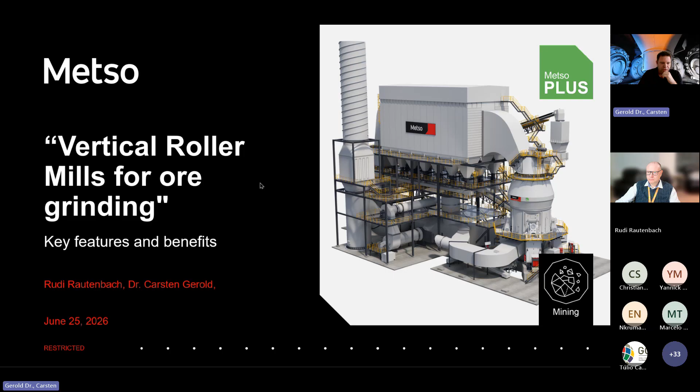So the final outcome is that for this given project, the VRM is the preferential case. Now I would like to guide you a little through vertical roller mill for ore grinding—what are the key features and benefits. Some of you know the technology very well, others don't, so I'll try to squeeze in as much as possible within these 45-50 minutes. There might be some points open, but kindly just raise your questions afterwards, and let's start.

Vertical roller milling technology is not a new technology. In 1927, the grandfather of the current owners invented this technology, and the start of the company making vertical roller mills was in 1927. The company itself is a little older, from 1906. We introduced this technology into a new market, which was raw material or raw mill grinding, basically limestone grinding in the cement industry. Afterwards, Loesche was the first to introduce this technology to cement and slag grinding, and additionally to industrial minerals.

Since a longer time, we also have a few applications in ore grinding, and the latest one is the West Musgrave project, where we have been awarded a 12 million ton copper nickel grinding plant in Australia. So this is not a new technology—it might be new for the ore industry, and surely we see regional knowledge differences. For example, in Australia a lot of people are now familiar with it, in South America it increases, in South Africa also some more people know about it. But together with Metso, we are very positive that we can spread this technology much deeper into the industry.

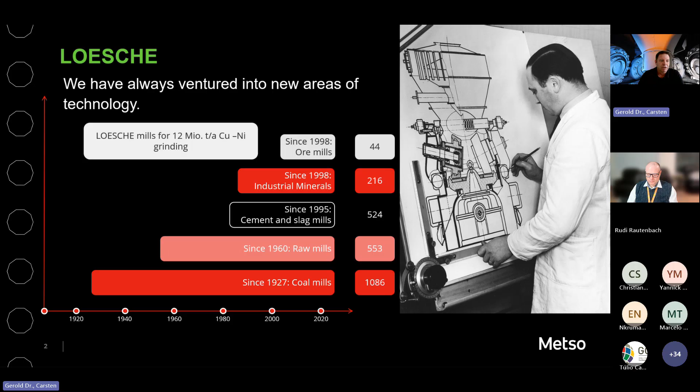Okay, let's talk about the functionality and the flow sheets. On the left-hand side, you see a grinding plant, and it's actually crushing and grinding.

The VRM, or vertical roller mill, is kind of misleading because it's really crushing and grinding. The advantages we see are that depending on the circuits we utilize, we can provide energy savings up to 40%. It's a dry grinding technology, therefore it enables fully dry or reduced water processes.

We don't have the need for grinding media. It's a very compact design that can be achieved, comparable to the footprint of an SABC circuit, but with reduced civil and steel works. The technology has an outstanding reduction ratio of 3,000, or actually even much higher than that.

We can theoretically feed 150 millimeter and grind them down to a P80 of 20 micron, mainly by an internal grinding classifying circuit. What we see through the compressive grinding that we do is that we get an improved mineral liberation, less sulfide oxidation, steeper particle size distributions, improved downstream recovery, and up to 7% better flotation performance.

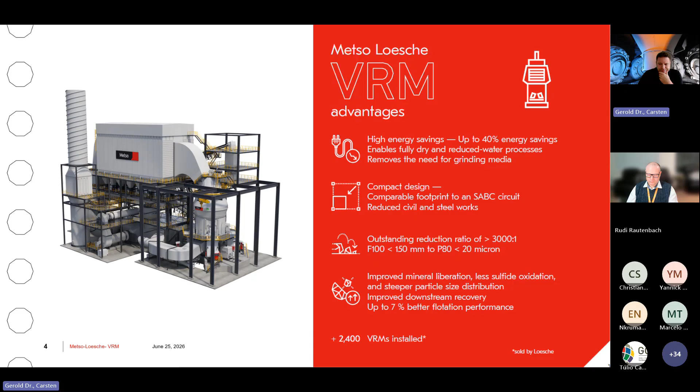Up to now, we installed more than 2,400 VRMs. And there's different points we will touch today.

So there's the columns of operating expenses. We just mentioned up to 40% energy savings. We have few stages of reduction, no grinding media. The water saving potential is up to 25%.

We will get examples for that. It can also go higher. And grinding media saving is also a big point. It's up to 97% lower metallic impurities.

Other points that we will touch are the downstream behavior, like the steeper particle size distribution curves we get with up to 20% less fines, minus 20 micron. We see a superior mineral liberation rather than size reduction. And like already stated, up to 7% better flotation performance.

The particle size distribution we get out of the machine, because it's pretty steep, also improves the recovery and magnetic separation or density separation. And the point which I think is really important for the ore industry and very beneficial is the operational flexibility, because the technology can adapt to feed changes within minutes.

It offers stable production and product quality because all the main grinding process parameters are online controllable. And having a dry grinding product, you can buffer between the comminution and beneficiation process, which can be very helpful in different occasions. But now let's touch the OpEx aspects a little bit more.

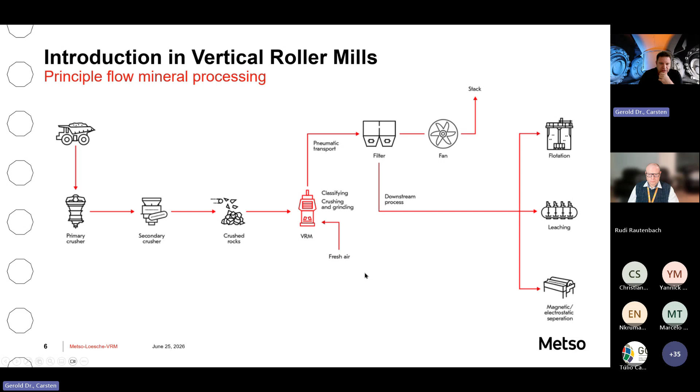I'd like to recall it's a dry grinding principle. And the final product is dedusted in a baghouse. Usually the target is to produce a primary feed for primary flotation, for fine leaching, or for the rougher magnetic separation. We will talk a little about the way how the mills are built up.

The comminution area, comminution zone, with the grinding table and the grinding rollers, in our case conical. The grinding happens, or crushing grinding happens, in a compressive bed, and through the conical rollers we combine compressive and shear forces, which brings us a pretty good degree of liberation.

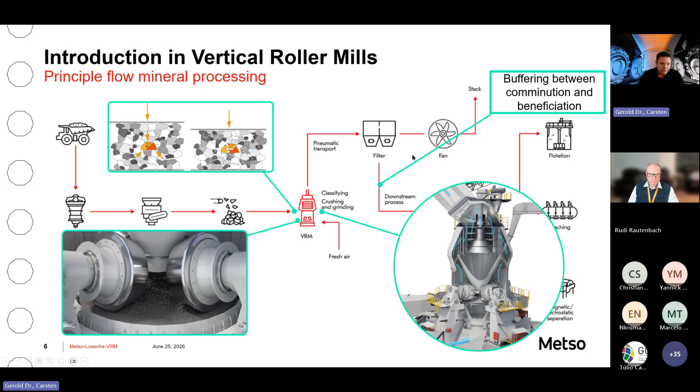And like said, having a dry grind product, we can buffer between comminution and the beneficiation processes. The reduction ratio of these machines is really astonishing, and therefore processes can be much simpler with increased efficiency in comparison to other technologies.

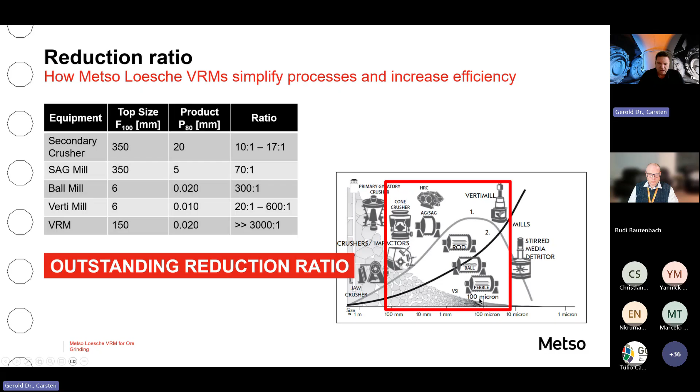So you can either feed it very coarse, if you have a soft material, but you can also feed it with 150 micron if you want to grind iron concentrate for pelletizing, for iron pelletizing. So it's a really flexible piece of equipment.

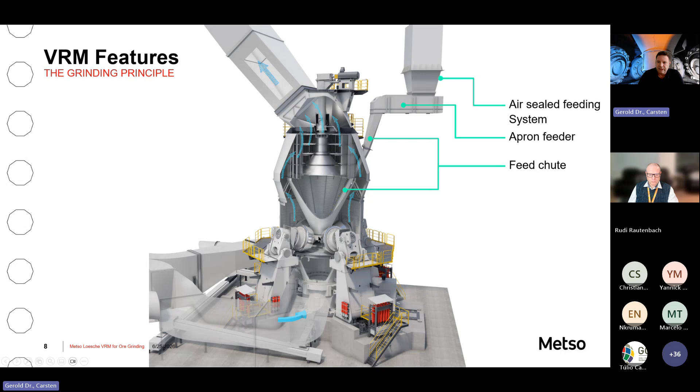The mill table is driven by the mill gearbox and the mill motor, and then we have the grinding rollers, which are fixed. The comminution zone is between the fixed grinding rollers and the turning table. In the bottom, you see the gas inlets.

So the fan is sucking air through the mill, through the baghouse, and then, if you like, you can recirculate it. But the bottom part has the job to equalize the gas flow, and then the gas evenly streams into what we call the process room or process area.

The grit cone has two jobs. On the one hand, it optimizes the gas flow to the classifier. It's a high efficiency dynamic classifier, which you see on top. At the same time, everything that the classifier rejects is guided back to the center of the grinding table, where it's recombined with fresh feed. So we mainly have an internal grinding classifying circuit. There's just a little portion of about 10% that is then discharged via conveyors here at the bottom and mechanically transported, because we don't want to apply that high energy to also keep these big particles in the mill.

The classifier, like I said, is a fourth generation dynamic classifier. And then the product gas stream goes to the baghouse.

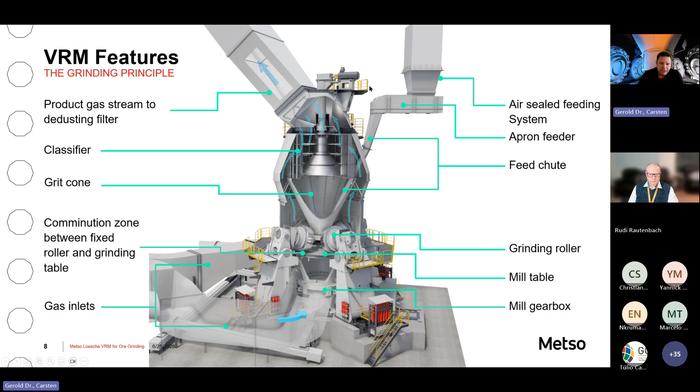This is how the mills look from the inside. This mill is a 69.6, that means 69 decimeters, so 6 meter 90 table diameter and 6 grinding rollers. The height up to here is about 35 meters, so it's a big piece of equipment that we're talking about.

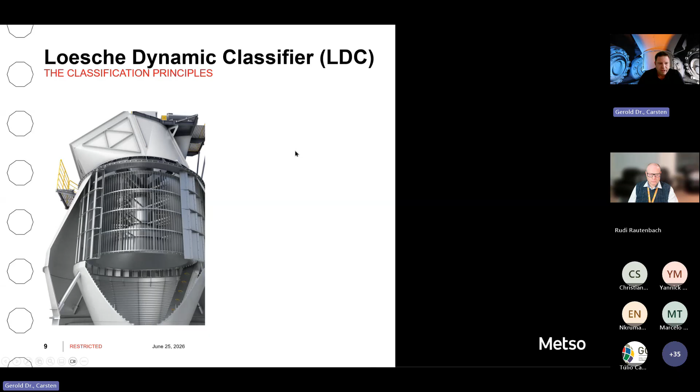Because the classification is completely different to what you usually know in cyclones or screens, I think it's worth touching on the classifier itself a little bit. The classifier consists of the guide vanes, which are static. You see them here on the outside. Then we have the rotor, which is the internal part. The rotor is turning. The rotor blades are the vertical blades that we can see here. And the rotor is driven by a motor in the gearbox.

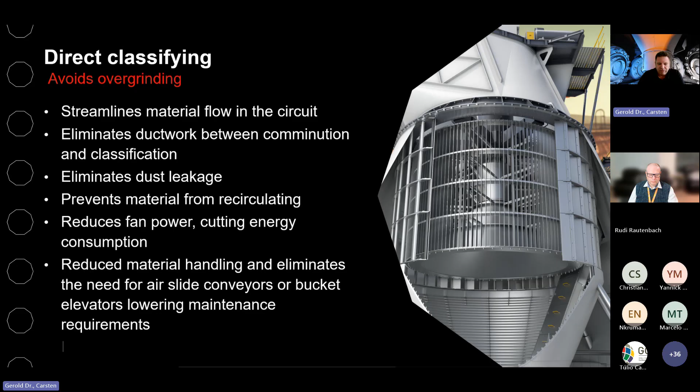The advantage of the classifier is that it really streamlines material flows in the circuit. It eliminates ductwork between comminution and classification. It eliminates dust leakage, so it's really good because a lot of people are concerned regarding dust emissions, but because everything is at negative pressure, you don't have to fear about that. The classifier prevents material circulation. It reduces fan power, and therefore it cuts energy consumption. It reduces material handling and eliminates the need for air slide conveyors or bucket elevators, which lowers your maintenance requirements.

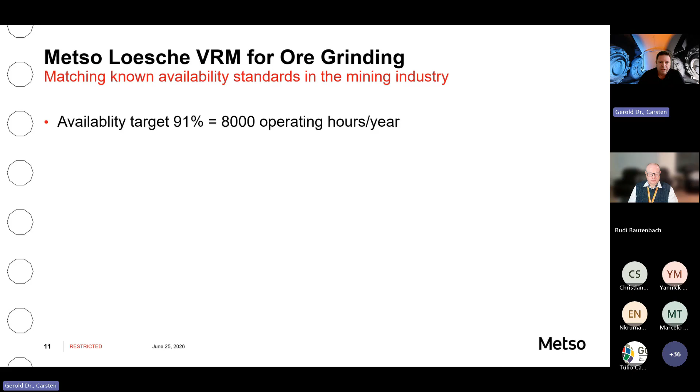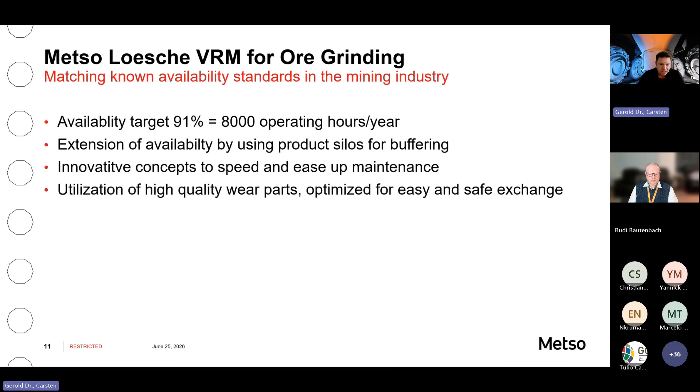So what is the difference now with a Metso-Loesche VRM for ore grinding? The point is there's a lot of VRMs on the market, but we really took a lot of time and research and optimization work to make it suitable for the mining industry. Because within the mining industry, you have to achieve at least an availability of 91%, or 8,000 operating hours. We can extend that even further by using the dry product silos for buffering. We have a lot of innovative concepts to speed up and ease maintenance, because that's important to get acceptance in the industry.

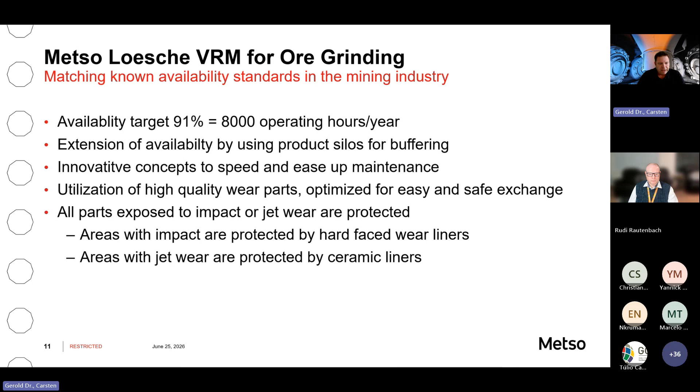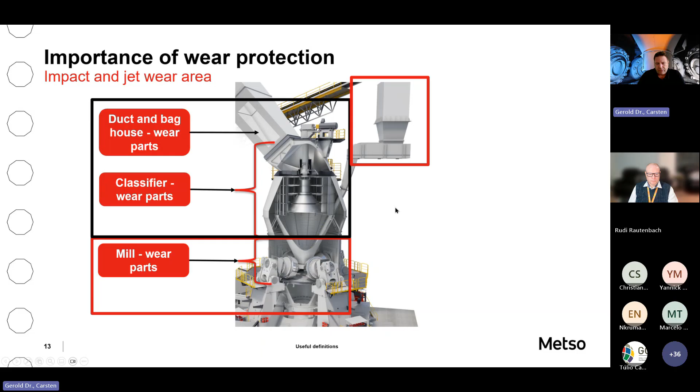Therefore, we choose different wear products for the different areas of the circuit, and that makes it basically unique in the industry.

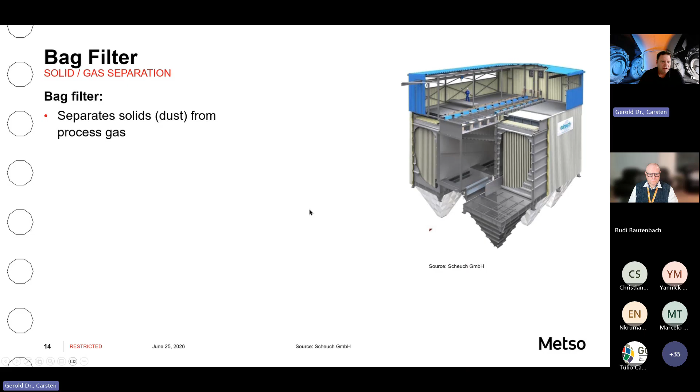Another piece of equipment that is probably new to you is the way we de-dust the systems. In this case, the example of a Scheuch baghouse, because somehow we have to get the solids out of the gas flow, and that is done in these baghouses.

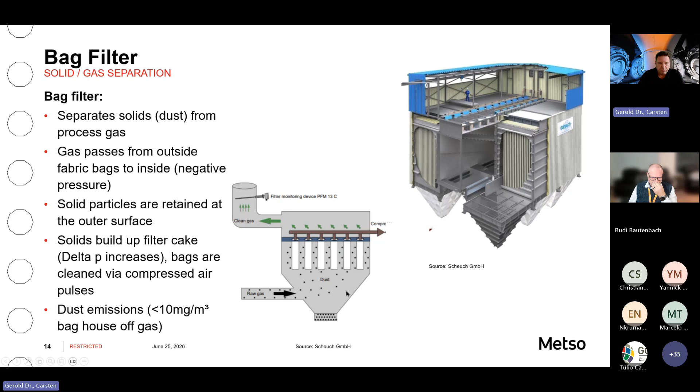So this is the way we can de-dust the material out of the gas stream. The dust emissions in modern baghouses are below 10 milligrams per cubic meter. If it's required, we can also reduce that to 5 milligrams.

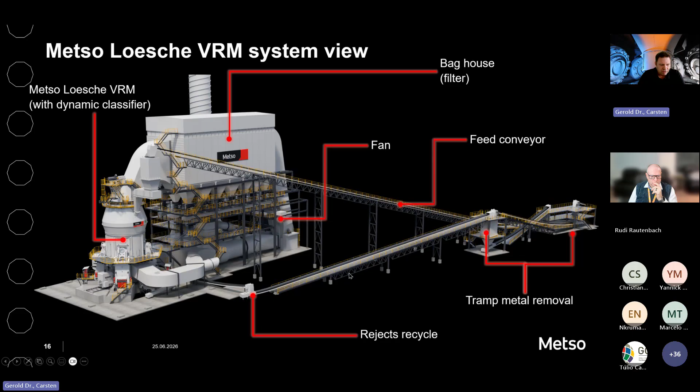And now I would like to show you a short movie because it touches a lot of the points that are mentioned here.

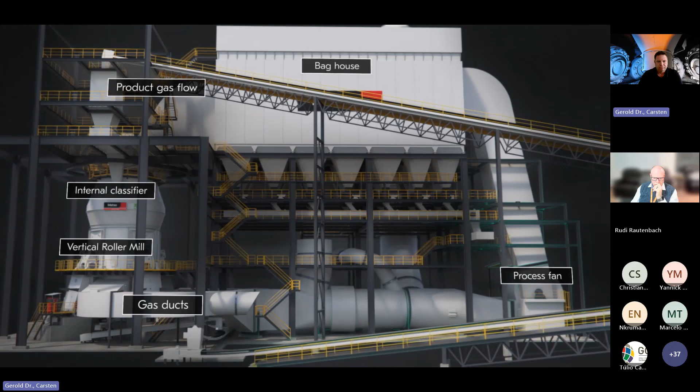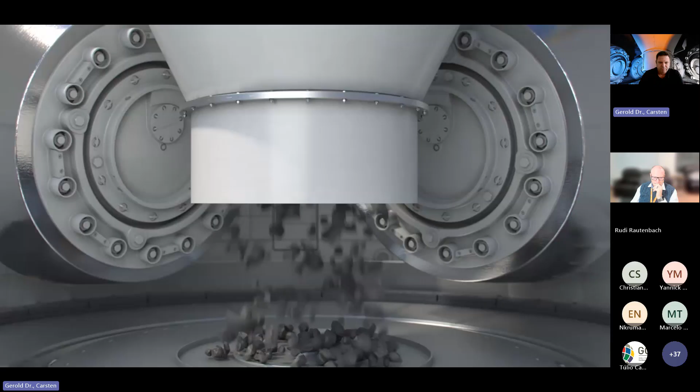Just making a short stop here because I think, especially for comminution people, this is the interesting part. So the material is fed to the center of the grinding table, and then via the speed of the table distributed to the outside below the roller. Circumferencing the grinding table on the right-hand side here to be seen is what we call the dam ring.

We utilize the height of the dam ring to adjust the product particle size, respectively the retention time. Surrounding the grinding table is what we call the louver ring. This is where the gas enters the system. And just so you understand, what is happening in the comminution zone is between the grinding roller and the grinding table.

Okay, so now let's talk a little bit about how the VRM increases the efficiency of the mining industry. Coming back to that slide with all the benefits, we now want to touch a little bit on the downstream behaviors. Therefore, it's important to understand how the comminution or rock crushing grinding really happens, because we have a bed breakage. Let's say this is between 60 to 120 millimeters, depending on the mill size and the final product particle size.

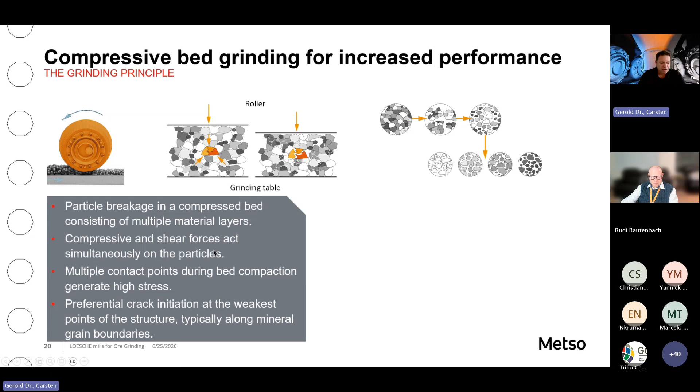But you will always have multiple layers, so the particle breakage happens in multiple layers. It's a combination of compressive and shear forces, which act simultaneously on the particles. We have this fluid-like stressing from all sides on the agglomerates, and therefore we see preferential crack initiation at the weakest point of the structure, which is typically along the mineral grain boundaries.

Resulting microcrack formation enhances liberation while reducing excessive fines generation. It's an enhanced intergranular breakage that leads to an improved degree of mineral liberation, and we see increased selectivity due to the preferential breakage of the mechanically weaker mineral.

To add to that, I forgot to mention, because usually you don't have that much control over your grinding forces. Within the VRM, you have the hydropneumatic spring system where you can steplessly control your grinding forces and thereby really optimize them for the purpose.

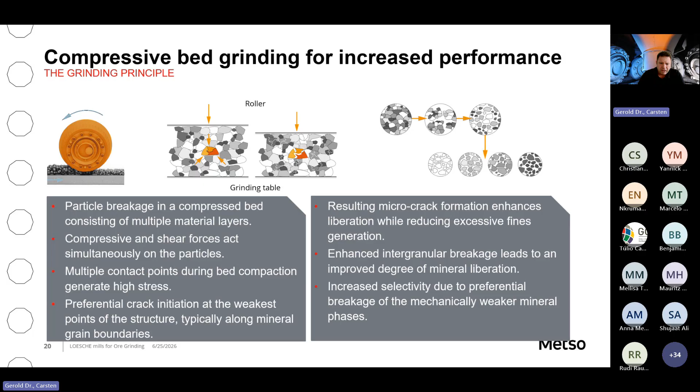And the result of this, the way we grind - within the movie, you saw that after being ground, the material is accelerated and then gets the chance to be classified. So with this very quick internal grinding-classifying circuit, after 1 or 2 grinding contacts, we classify the material. We take it out as soon as it's fine enough and according to the specification. That results in a completely different product particle size.

This is an example of joint work we did with Anglo American on a UG2 platinum ore. The bond work index is around 24. What is compared here is, in green, the product particle size of a VRM in comparison to ball milling. The black curve is the industrial ball mill, the gray one is the laboratory.

What you can see is we have a steeper particle size distribution in total. We have less fines, and we have less coarse. That changes your degree of liberation very much, because in that coarse area there's still intergrowth between your valuable minerals and the gangue material. But with that direct classifying we have, we get a very efficient classification, a steep classification. Therefore, these product particle size distributions look different.

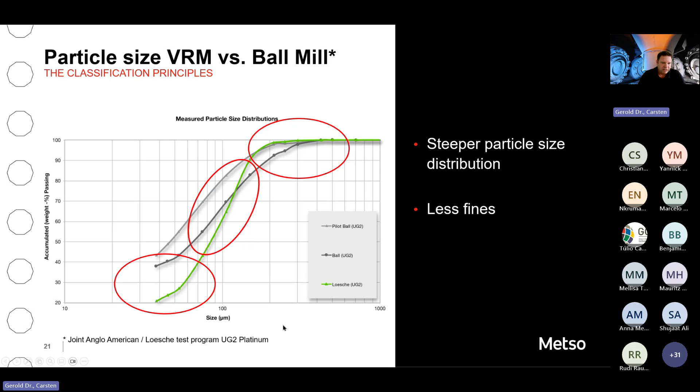And if it's steeper, it's easier to adjust your downstream process. So every particle gets the treatment it requires.

In comparing the VRM system to other systems, in this case done with Anglo American research on a zinc ore, a SAG mill ball mill circuit was compared with a crusher HPGR ball mill circuit, cone crusher vertical roller mill, and cone crusher HPGR vertical roller mill. The most energy efficient was the combination of cone crusher and vertical roller mill.

There will be processes where it's very beneficial to combine an HPGR with a vertical roller mill. But in this case, because it was a zinc ore, it didn't really make sense. The energy saving here that was achieved was above 31%.

The freshly created dry surfaces respond very well in flotation kinetics. Copper floats very well anyway, but even here we could increase copper recovery about 1.3%, and molybdenum recovery by about 6.5%. That's explainable because molybdenum is a very soft metal, and usually in the ball mill it tends to be overground and starts to smear. But because we directly classify it out, we could highly increase the molybdenum recovery.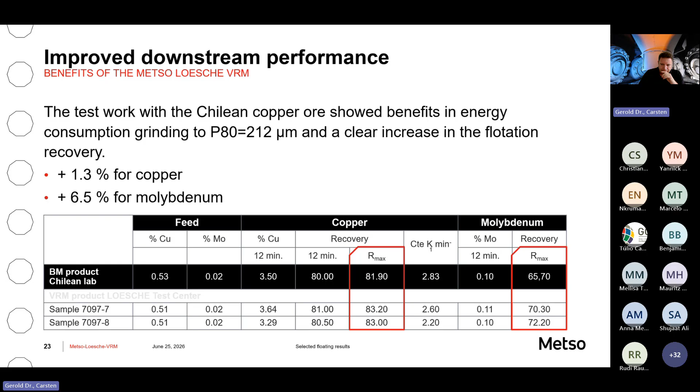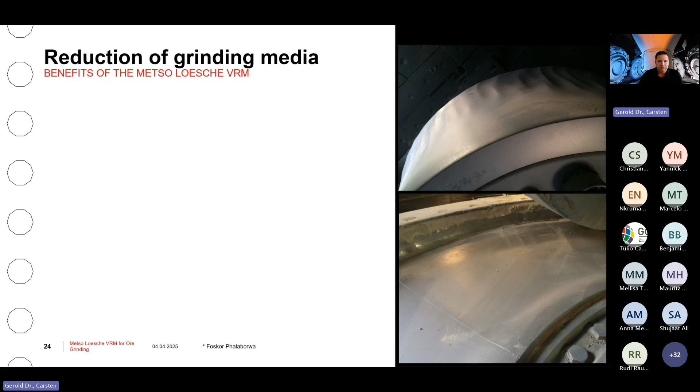So this is something we often see, depending on the element, sometimes stronger, sometimes weaker, but we often see improved flotation performance. Speaking about grinding media consumption, in this case it's a plant where a VRM is operated in parallel to a rod mill ball mill plant with a tertiary crusher in advance. Here we utilize high chrome grinding elements.

You see on the top right the grinding tire, and on the bottom right the grinding track. High chrome is, let's say, the lowest quality that we use. But in this case it's a phosphate rock with a bond work index of 24 kilowatt hours per ton.

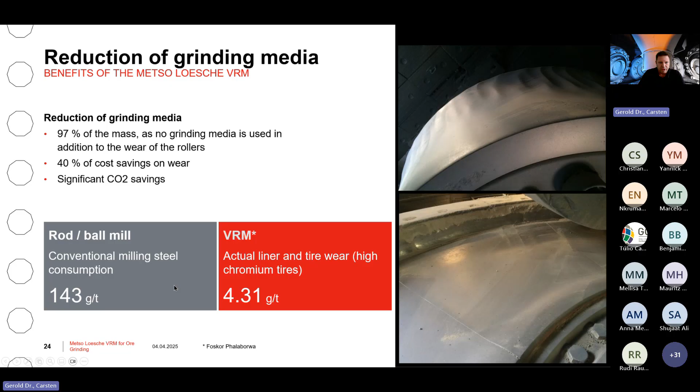The comparison of wear shows that 143 grams specific grinding media consumption is achieved with a rod and ball mill, while the VRM has about 4.31 grams per ton—massively lower, about a 97% reduction. That surely is very positive for flotation because you have less metal in flotation, but you also get a 40% cost saving. And if you consider the metal and its production, there are also significant CO2 savings.

So let's talk a little bit about references and case studies. The first one I want to discuss is the West Musgrave Copper Nickel project. It's an ore with a bond work index of 18.4, and the A times b is 37.3. You can see the other data there.

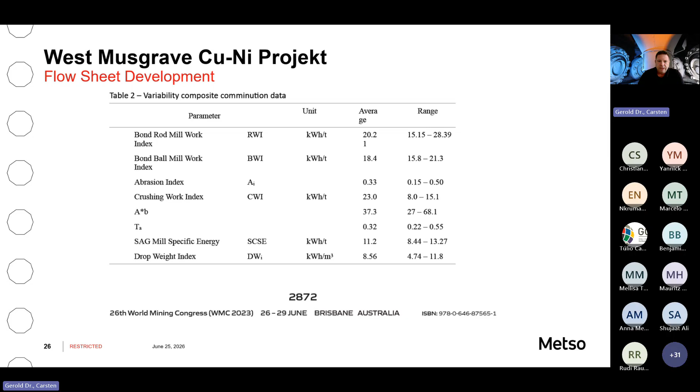Initially they were targeting a SAG mill ball mill flow sheet with pebble crushing and sequential flotation. But this plant is in the middle of nowhere—600 kilometers from the next electrical grid, 800 from the next city, so there's really nothing there. They were looking for ways to optimize project efficiency.

We carried out a lot of pilot test work together with them, and finally, in the pre-feasibility stage, they changed the process to primary crushing, secondary crushing, and then VRM for grinding, followed by bulk flotation and regrinding.

Taking a look at the grinding advantage, in this case we had only a 20% reduction. But considering that this mine is really so far off from anything, the cost saving for providing the energy is massive. It was one of the first hybrid projects.

The target was to go with solar power, wind power, and accumulators to basically run the complete project. This is also one of the reasons to decide for the VRM, because to utilize renewable energies you need a flexible grinding system, and that is very difficult to achieve with a wet tumbling mill. But the vertical roller mill—as all the main process parameters are online controllable—can be easily adjusted to the conditions you have.

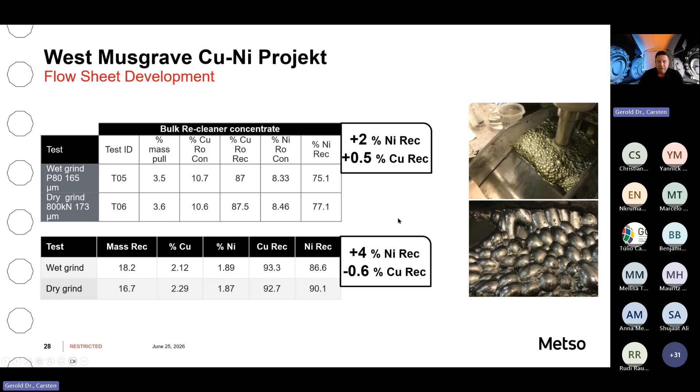But it was not only energy. Different flotation programs have been carried out, and in one of them, nickel recovery was 2% higher and copper recovery 0.5% higher. They also optimized the flotation device a little, and then up to 4% increased nickel recovery could be seen. Copper recovery is more or less similar, so it always depends a bit on how you tune your flotation device, but nickel really responds very nicely to being ground dry, and we saw that in a lot of other projects too.

So when we take a look at the plant layout that was chosen, you see that it's two plants, one behind the other. The feed is coming from the right-hand side. And at the end of the process, the product is buffered in 3 product silos.

So they have a 12 million ton per annum production with 1,500 tons per hour capacity in the grinding and in the flotation. With these bins, we can offer a continuous operation of the flotation circuit during maintenance, just because you take out one of the plants, but the other plant can operate with a slightly increased throughput, and you still have these 18,000 tons of silo, which are just possible because it's a dry grinding product.

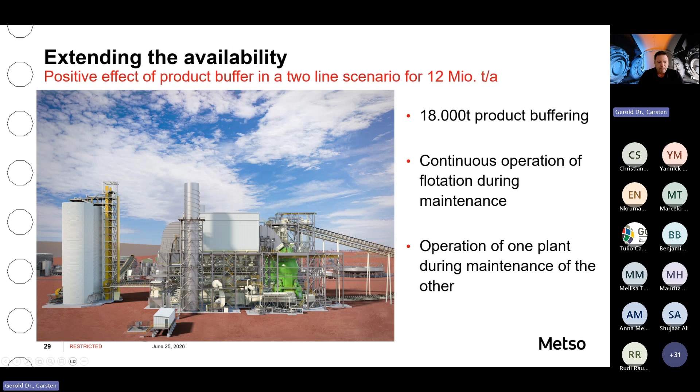And then you can do maintenance on the plant, and when the maintenance is over, you just switch back the plant, and then you're back to production.

To show you what happens, it depends on how much you want to reduce your flotation. The normal case would be 1,500 tons. But if you reduce it basically to 1,000 tons, so you reduce the capacity in flotation by 33%, you could basically run maintenance for a very long time. This is a thing where I really see a benefit in dry processing or dry grinding.

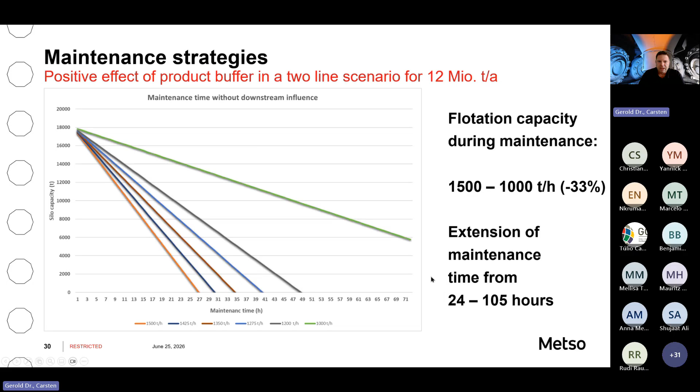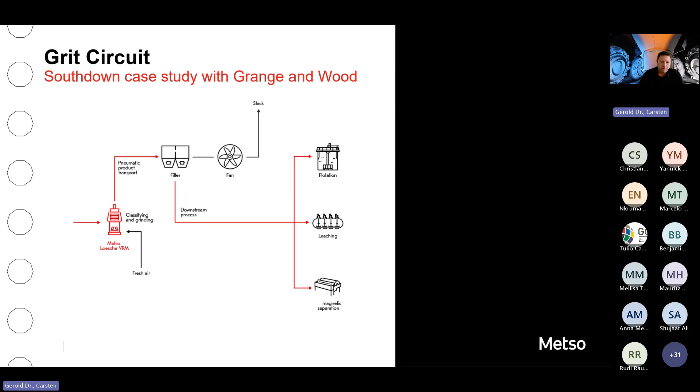Now let's come to some other circuits. What I showed before is what we call the airflow circuit. The case I want to speak about now is the Southdown case, a bankable feasibility study with Grange Resources and Wood for a project in Western Australia.

Initially, the flow sheet looks similar, but what is different is we take the coarse fraction of the classifier, guide it to a magnetic separator, and we just recirculate the concentrates, while we try to separate the non-mags, the gangue material, as early as possible.

At the same time, the main idea is to produce a product for dry magnetic separation and flotation, but surely we want to reduce the amount that has to be ground. By that process, we have an early waste rejection.

We have a reduced amount of ore to be ground, because you can imagine all the silicious fraction that we take out is increasing the capacity, reducing grinding media consumption, and also lowering the energy. We just lately received the patent for this process, and therefore we really think it has a lot of potential.

Additional to just reducing the mass to be ground and optimizing the process, where it's getting really interesting is that this size fraction is about P80 250 to 550 micron. So you can do very nice things with that.

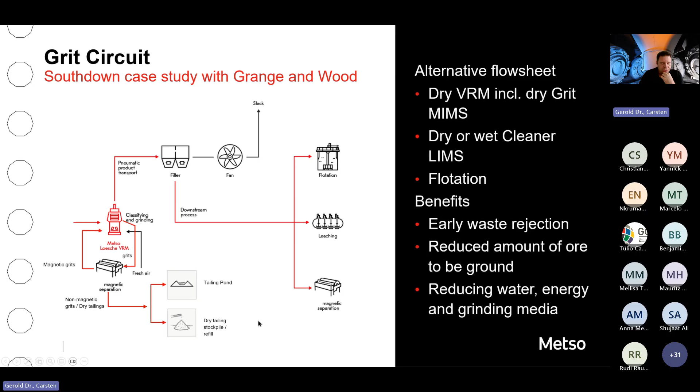Originally, within that project, all the gangue would have gone to a tailings pond. But within that project, because we could separate about 35% of this dry coarse fraction, it can be commingled with your fines from the other processes. So basically, just by changing the process, you suddenly can switch to dry stacking. And regarding the permit structure in a lot of ore projects, that's a real benefit.

So giving some more numbers from the pilot campaigns that led to the project: within the pilot test work, we even achieved higher rougher magnetic separation rejection of 41%, but for the business case, that was reduced to be more on the conservative side.

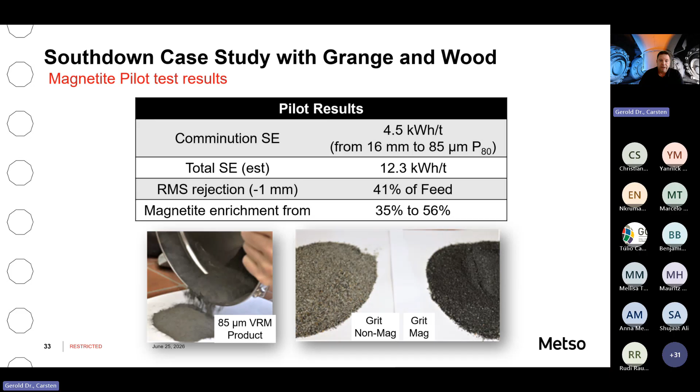But the magnetite enrichment that could be achieved simply in the grinding - you could increase the magnetite from 35 to 56% as part of the grinding. And that really simplifies your process, and it highly extends your dry processing.

Comparing now the final data of the solution that the Metso-Loesche VRM provides in comparison to the wet milling, which was an SABC circuit, wet SABC circuit, which resulted in 20.8 kilowatt hours per ton, we had a 41% saving of energy.

We could increase the gangue material that was rejected by 9%, and the plant water consumption could be reduced from 5.1 gigaliters to 3.9 gigaliters, which is 25%.

But one of the biggest issues is changing, or being able to change from wet to dry stacking. The saving in energy equals 127,500 megawatt hours per year. In water, it's 1.2 gigaliters per year.

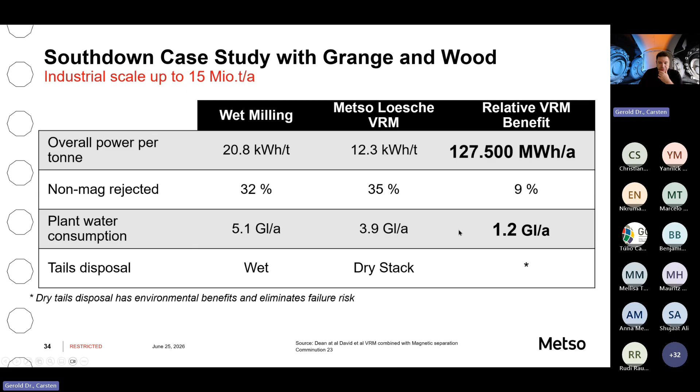And to visualize that a little bit, 127,000 megawatt hours is about the energy consumption of 9,100 average households in the EU. And when you consider the water amount, that's about 1.3 Olympic swimming pools per day of water that you save.

And surely for areas like Australia, Chile, Peru, Southern Africa, Northern Africa, where water is critical, this can have a massive impact on your project economics, and also in getting it running at all.

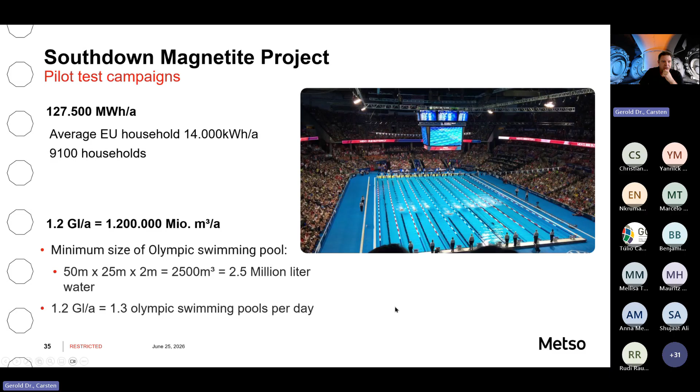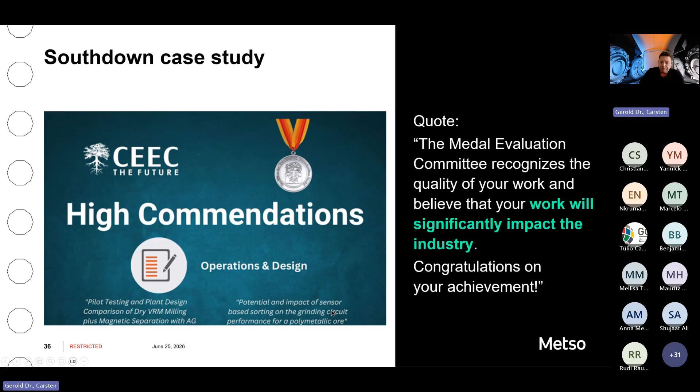For that new process, we received a high commendation from the CEEC, which we are really happy about. They saw that this work will have a significant impact on the industry, and therefore we also got a nice certificate, and we're really happy.

Another thing which we think where the VRM is very valuable and could easily be installed in processes is pebble grinding.

Pebbles are often difficult to foresee - they suddenly arise and disturb your circuit, accumulating and making it less efficient. But what if you could take out the harder to grind pebbles? Just send them through the VRM, where you can bypass the complete system.

The VRM can do the same job as the SAG mill and ball mills, so you basically have a primary feed for your flotation process. If your pebbles differ in mineralogy, you might choose a different flotation circuit, or combine it with a product of the wet process, since wet processes always have the issue of inconsistent feed.

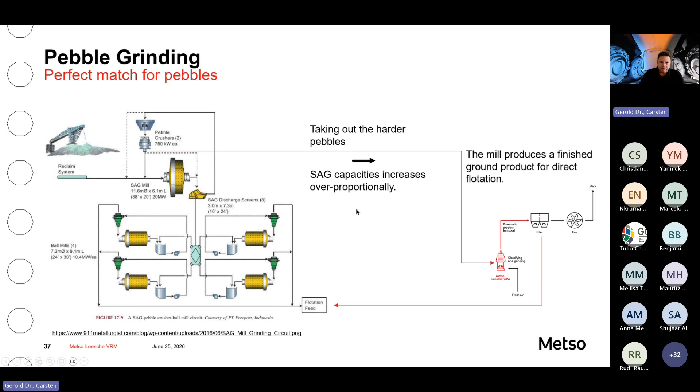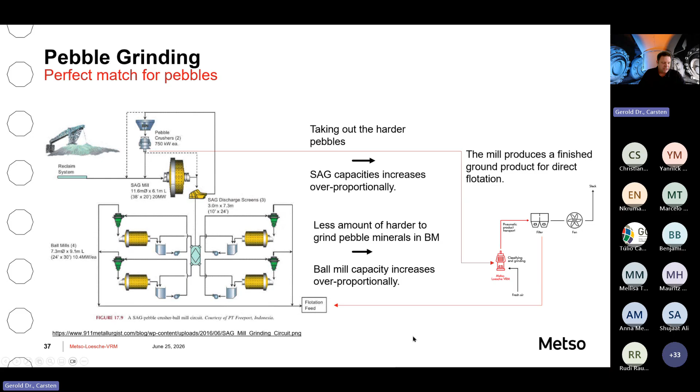If you have fluctuations in your wet circuit, this can be an ideal solution - you can easily stabilize the feed to flotation with that dry product, dosing it exactly as needed. By taking out the harder to grind component from the circuit, your SAG capacities increase over proportionally, and you feed less hard minerals to the ball mills, so they also benefit over proportionally in capacity. We think this is really a nice thing for VRM applications.

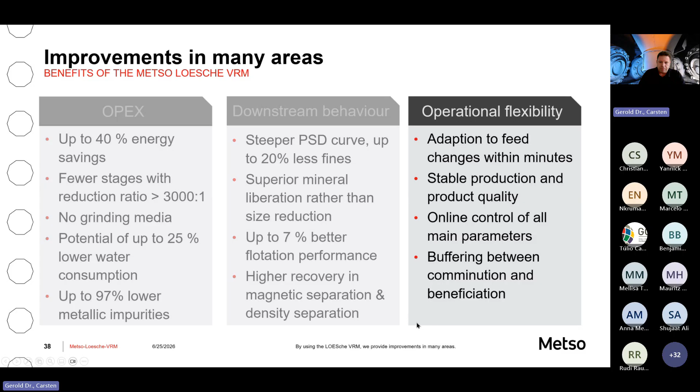An important point, and a big difference compared to conventional tumbling milling, is the operational flexibility. We'll talk about why you can adapt to feed changes within minutes and stabilize production and product quality. The main reason is that all main parameters are online controllable, and next to that, there's buffering - though that's not really process related. But let's talk about the process itself.

Speaking about the mill, we can precisely adjust the feed amount. We then have the grinding pressure, which together with the table speed defines how efficiently the comminution happens - that's one of the force pairs we have. The other is the volume flow, shown by these blue arrows to the top - imagine a suction to the inside of the classifier. That's one force.

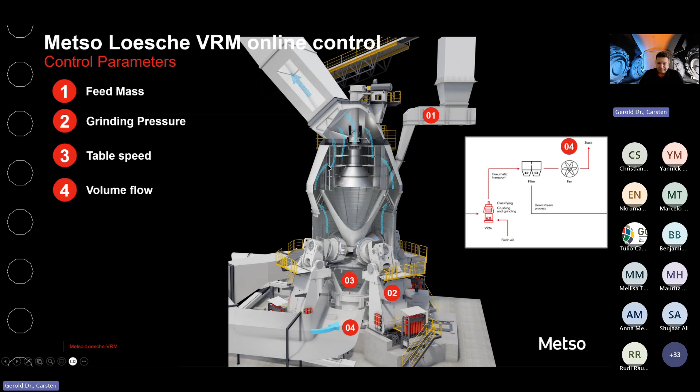The other force is the centrifugal force created by the classifier RPM. The faster the classifier turns, the higher the centrifugal force to the outside. So in normal operation, changing the classifier RPM also changes your product particle size. You can basically follow your degree of mineral liberation, which is very difficult to achieve with a wet milling system, because you have ball charging and are relatively limited in the range of critical speeds you can set. But with this technology, it's very easy to change your final product or follow the degree of mineral liberation.

What we see as a really big advantage is the differential pressure that we measure. During commissioning, we measure the differential pressure, which is nothing else than a signal for the internal circulation in the mill, and you can identify when this is at an optimum point.

Let's assume your feed is getting softer - what would happen? It would grind faster and leave the circuit faster. At the same time, you'd see your pressure drop reducing, which means the mill has capacity left. Then you can automize your feed to stabilize that pressure drop, meaning feeding more material to the mill and therefore utilizing it to the maximum.

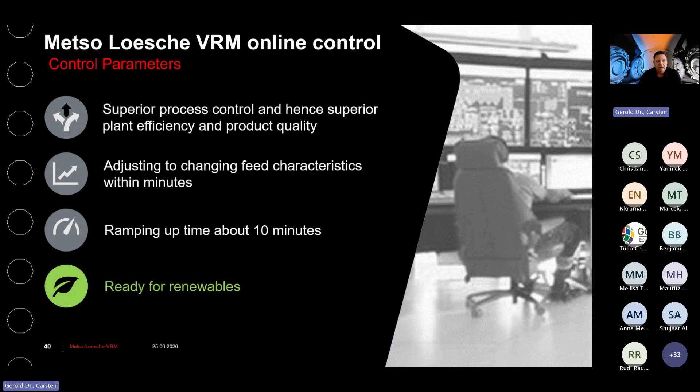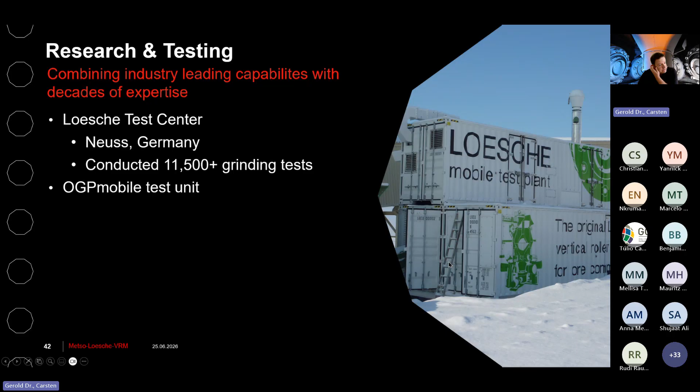Speaking about test capabilities, at the moment we have two places where we can test the vertical roller mill. It's going to be more, but currently there's the Loesche Test Center in Neuss, and we have a mobile unit called the OGP Mobile, shown here on the right hand side. Up to now we've tested ores from a lot of areas in the world. In total 238, the majority being iron ores, followed by copper ores, phosphates, gold, and a lot of others - nickel, tin, zinc.

Manganese too. So we gained quite a lot of experience on how this technology behaves with different ore characteristics. In general, if the ore is getting harder, the efficiency of the VRM is getting higher, because tougher ores are more responsive to compression forces and are more brittle. So there we see a much bigger difference than with tumbling mills.

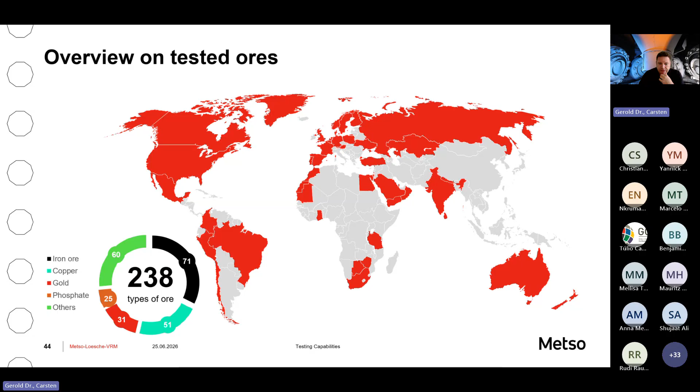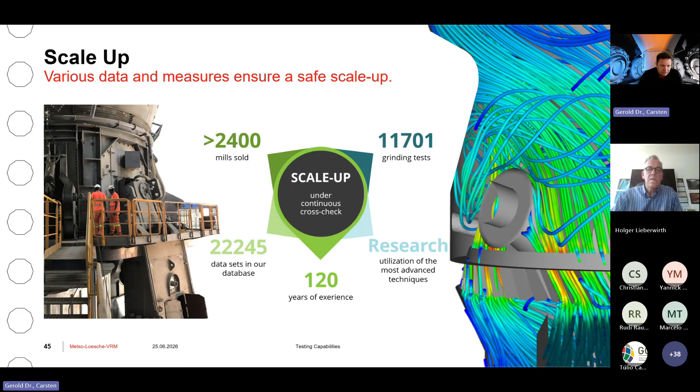The way we design and scale up our mills is under continuous cross-check. We have 120 years of experience in comminution. We've sold 2,400 mills. We permanently do research - more than 11,000 grinding tests carried out, 22,000 industrial data sets, and we've tested 238 ores. All of this is permanently put together to check that the scale-up procedure is solid.

So that was what I wanted to show you. I hope that was a lot, but everything was just touched a little bit. But therefore, we might have time for a few questions.

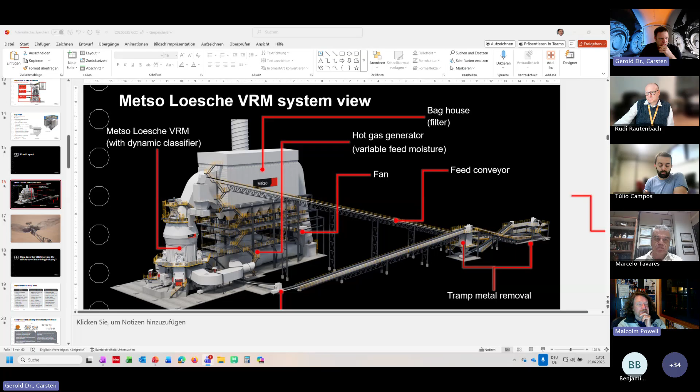I mean, actual bed depth under the rolls - the bed depth under the rolls should usually be, for magnetite projects, in the range of 80 to 120 millimeters, depending on how coarse you go. But the tramp metal removal here on the right-hand side, this is when you come from the secondary crusher. It's just basically a metal detector. That metal detector controls a two-way chute, and then you can get the tramp metal into this.

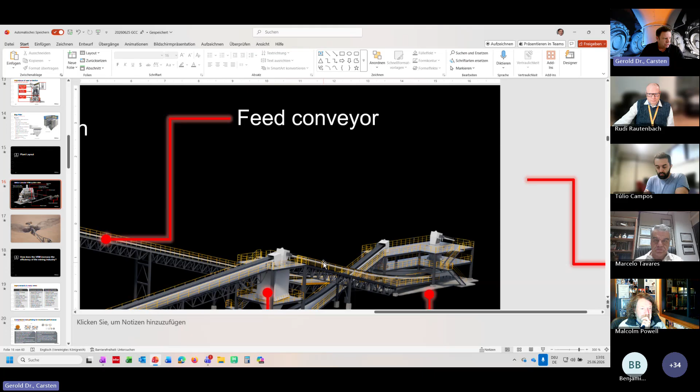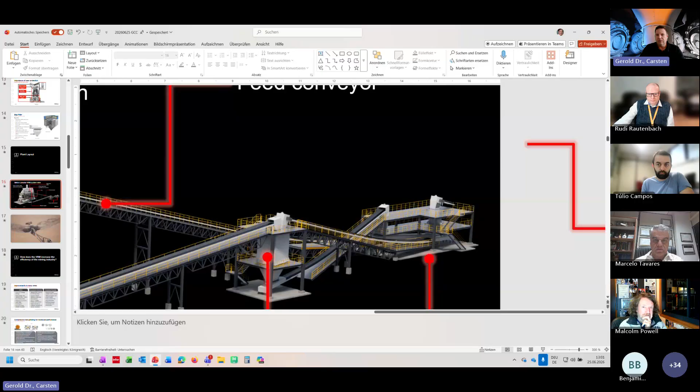It's a metal bin, we call it a metal bin. We utilize the same for the reject. And then with a slow running belt, we have another metal detector to get rid of the tramp metal, but to keep the ore within the circuit. So this is a well-proven system that we've utilized in the cement industry for decades.

So it's a two-stage system. That looks pretty good. And you have a 2-second flap, so your Y chute turns out for 2 seconds, and then, basically, this is why we like to work with that bin, because then we can really recover all the ore and just get rid of the metal particles.

Some clients, for cost reasons, decide they don't need that bin, and they just live with a little bit more material, which they then just deposit in the mine. I think it's also a function of throughput - if you've got several thousand tons per hour, just a second or two means a massive materials handling problem down the line. So if it's a small mill, maybe you can get away with dumping it, but for the larger mills, I'd say it's almost mandatory to have that proper rehandling circuit.

That's interesting, because I was wondering how you get it down. You two-stage it. That's very good. Thank you.